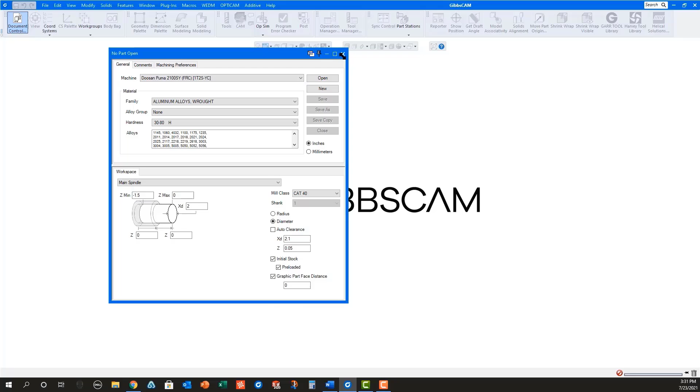First, you will need to open the solid model in GibbsCAM. It's best to select the proper machine in the document control dialog before opening the file. In this case, I'm selecting a Doosan twin spindle as my machine before opening a SOLIDWORKS part file named New Mill-Turn.

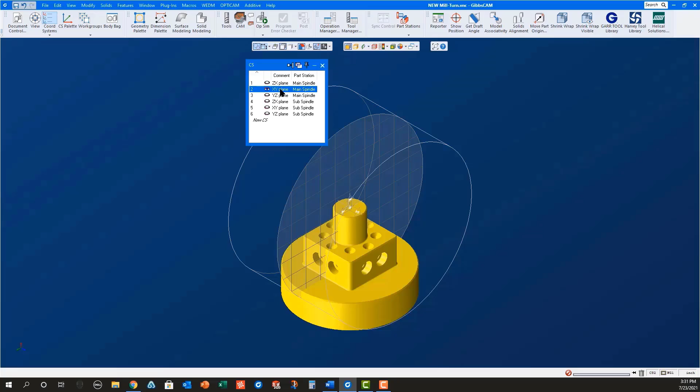Once the part is open, you will need to position the part properly in the main spindle. I find the easiest way to do this is to open the Coordinate Systems dialog and select XY plane for the main spindle. With Face Select turned on, select the front face of the part before right mouse clicking to align face to CS.

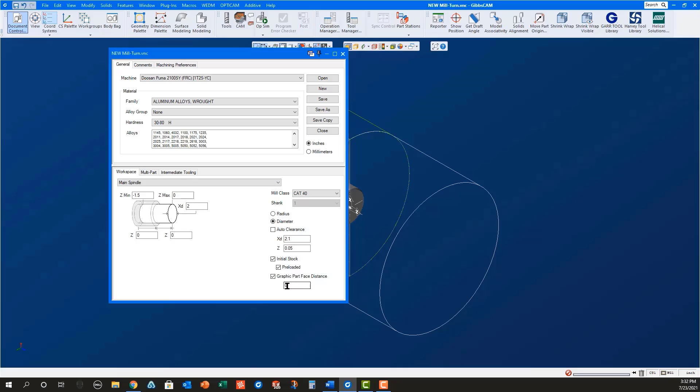Now use Modify Shrink Wrap to set the starting stock dimensions. Open the Document Control dialog and set the desired XD and Z clearance values, and then set the graphic part face distance to 0. Double-click the solid model to place it in the body bag and rename it Part in Main.

Select the part in the body bag and use Ctrl-D to duplicate it. The new solid in the workspace is now selected. Use Modify Translate to move this new solid into position in the sub-spindle. This will always be the length of the part in the Z-axis as a positive value.

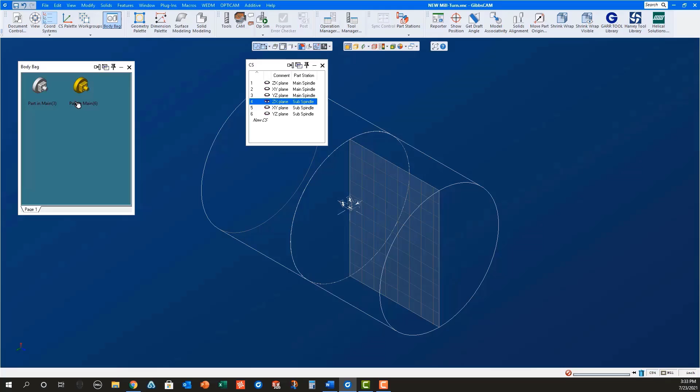Once this new part is in position in the sub-spindle, select the ZX plane in the Coordinate Systems dialog, right mouse click it, and change CS XYZ to make the solid belong to the sub-spindle. Double-click the model to put it in the body bag, where you can rename it to Part in Sub. Now double-click both solids to put them back into the workspace.

Open the Workgroup dialog. Rename Workgroup 1 to Blank since we will leave this unused. Click on New Workgroup and rename it to Check, as we will use this geometry to make certain everything is set up correctly for simulation.

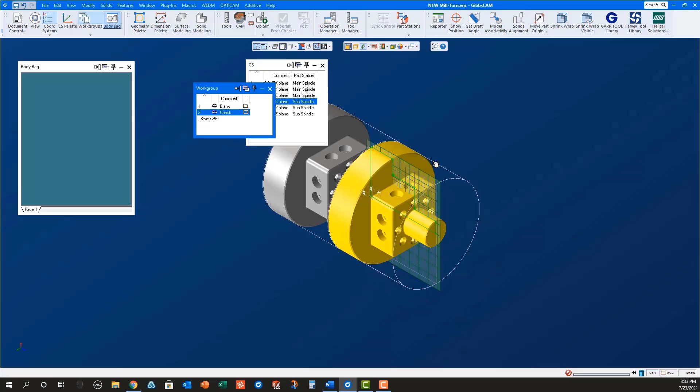With the ZX plane for the sub-spindle still active, turn on the profiler and Slice Spun Body. Select the green profile and then right mouse click on it to extract geometry. Now switch to the ZX plane for the main spindle. Select that green profile and right mouse click on it to extract geometry. Turn off the profiler.

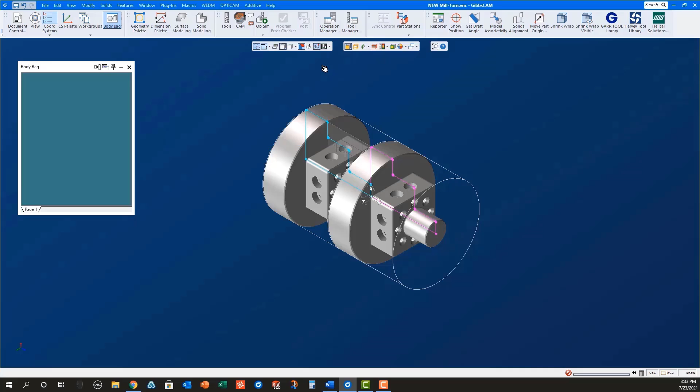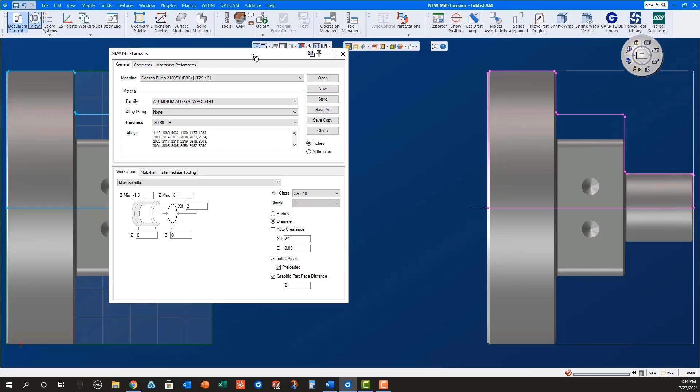Notice the geometry for the main is blue while the geometry for the sub is magenta. This is how GibbsCAM shows geometry in the active CS versus an inactive CS. Open the Document Control dialog and set the graphic part face distance to 2. Notice how the solid model and the geometry for the part in sub move with the stock for the sub-spindle.

While in the Document Control dialog, for the main spindle, set the Z max to 0.025. This will be the stock to remove with facing. Set the Z min to minus 1.65, which is the length of the part plus cutoff tool width plus stock amount to face in the sub-spindle.

For the sub-spindle, make sure Initial Stock is unchecked, since the stock is being transferred from the main spindle. Also, for the sub-spindle, set the Z max to 0.025. This will be the stock left by the cutoff tool to remove with facing. Set the Z stickout length to 1.025, holding on to 0.5 of material with the sub-spindle, with the part being 1.5 long plus 0.025 stock for facing with the sub-spindle.

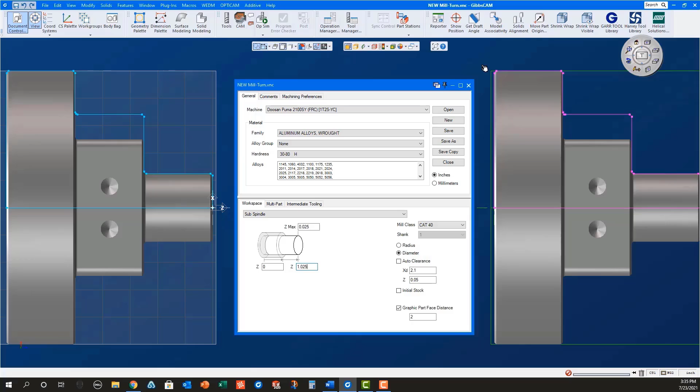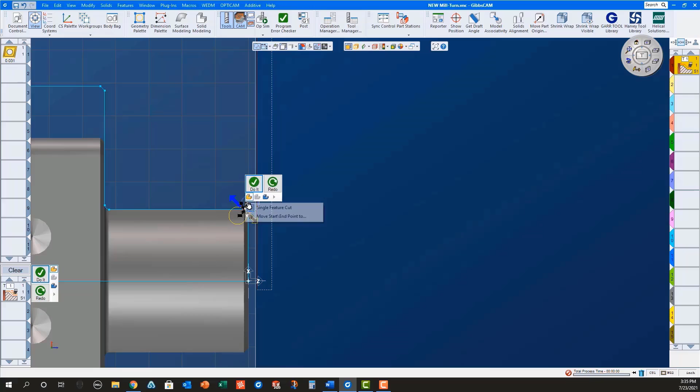Now that everything is set up correctly, we will program the part. First, I will load a facing process for the main spindle. Select the geometry, set the machining markers, and do it. Then I will load a turning process for the main spindle, select the geometry, select the machining markers, and do it.

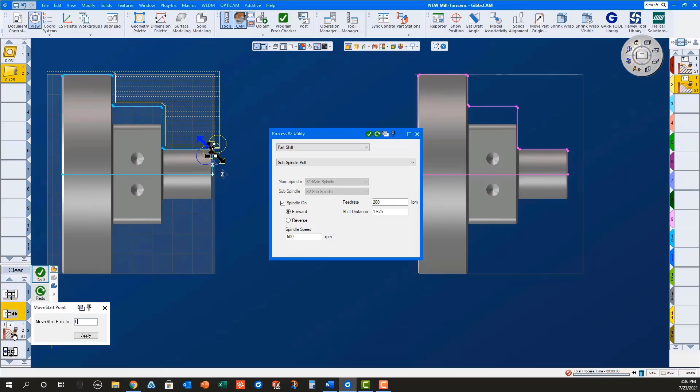Next, I will load all of the processes for picking off the part with the sub-spindle. These consist of a sub-spindle in process to a grip Z of 0.5, a sub-spindle pull with a shift distance of 1.675, which is part length plus cutoff tool width plus 0.025 stock for facing on the sub-spindle plus 0.025 stock for facing the next part, a contour part process with cutoff selected, a sub-spindle return with part in main.

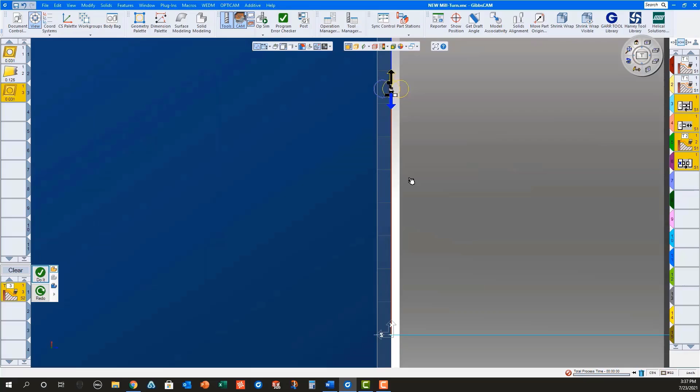I will select the geometry on the front of the part for the cut-off contour operation, and then do it. Finally, I will change the ZX plane for the sub-spindle, load a facing process for the sub-spindle, select the geometry, set the machining markers, and do it.

Using OpSim rendering with stop at part, load, unload selected, and overlay geometry turned on, I can clearly see that everything is set up correctly for machining in both the main and sub spindles.